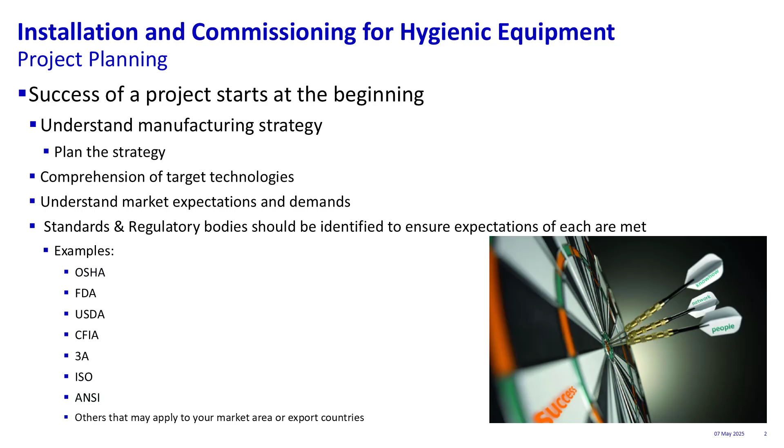And then if you are running or moving your project to export countries, understanding what their regulations are as well, because they may be completely different than where you're manufacturing.

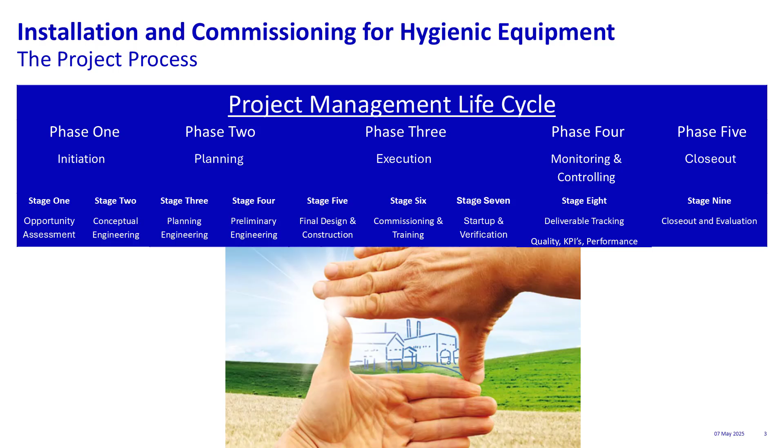Project management life cycle. These are best practices from the PMBOK. Basically, you're broken down into the 5 phases of a project. So your initiation, your planning, execution, monitoring and control, and closeout.

This is where upper management generally wants to start. They just want to dive right into the execution. They don't want to spend a lot of money in the initiation or really the planning stage. And this is where most projects will be broken right out of the gate.

So ensuring that you have your initiation plan and your planning stage and you have all the right people. Now you'll notice, because on the engineering side, when I say conceptual engineering, planning, there's many different engineering aspects, from your project engineers, your process engineers, mechanical engineers, so forth.

So there's many more pieces to each one of these stages, but I'm going to concentrate really on these engineering sections and then into the execution.

But really, these 2 pieces are where most of your time and energy should be spent, and then the execution and then really the monitoring and closeout become much easier. So the hard work is really up front.

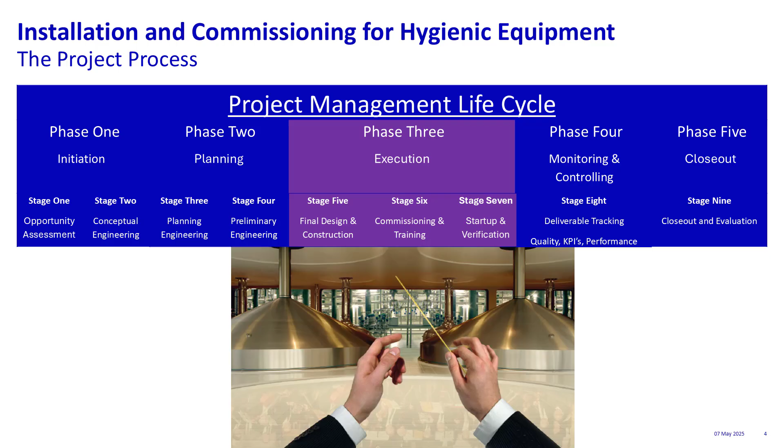We're going to dive in to the stage 5, final design and construction, commissioning and training, and startup on the execution side. And I'll cover some of the initiation and planning as well.

Project acceptance guidance. On the stage 5, you should have commissioning SMEs and tasks identified. You'll be completed at this stage.

Equipment design review. So those, again, were all done in the planning stage. These should be completed before you move into the execution stage.

Equipment delivered, so now that your equipment's arriving to site. But before it's arrived to site, you've completed FATs.

This is very critical. I've experienced this many times. We had a labeler that was very critical to the project, and because it was in Germany, upper project managers and upper management decided that they were going to the FAT, and that none of the people who were involved, the key stakeholders, so forth, were not invited and did not attend.

So when the equipment arrived and we asked for the FAT documents to say who did the checkout, none of the FAT documents were filled out. What I mean by FAT documents, you should have quality, original engineering scope, your safety protocols, everything should be documented on a document that you're going to check out on that equipment.

You're at stage 6 now, your commissioning kickoff meeting, and so this is important. So you have all your stakeholders, all quality, all operators, everybody who's involved in the commissioning stage. Don't leave people out. There's a lot of times where the core team meets and all the other people are left out, but they're still expected to operate and commission the equipment.

And again, safety review. So the whole commissioning team should be reviewing the safety, and if there's any other items that come up during those meetings, address them before you go out to the plant floor. And then again, the quality reviews, same thing. Review those documents. Make sure that you have all your quality issues resolved, or concerns resolved, or they may be low-level items both on safety and quality, and it's a longer-term fix as long as there's not a safety or a product quality issue, or you're going to induce product safety issues as well.

And then your punch list is now operationally complete. Again, you might still have some building punch list items or engine room punch list items, but you should be at an operationally complete stage at this point.

GMPs, SOPs, SSOPs are established. So these are critical, so when the employees are walking out to the plant floor, they know where they're going to wash their hands, they know what PPE is required, they know the standard operating procedures have been written based off the OEM recommendations. Obviously, they're still going to be modified as you move forward. And then your SSOPs for your sanitation team to ensure they understand how they're going to clean the equipment.

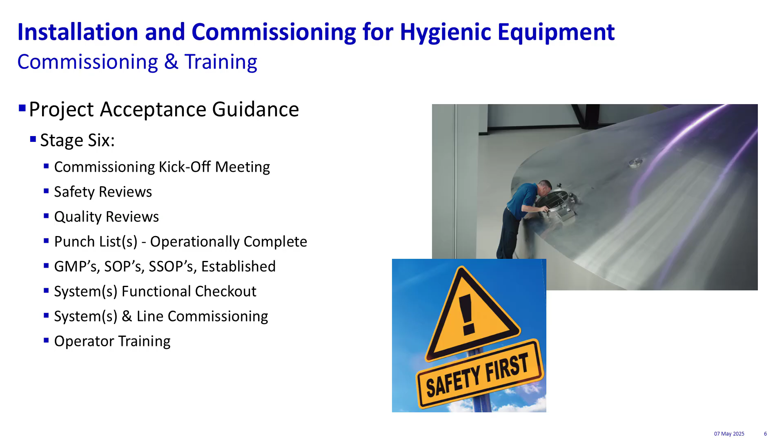You're through those kinds of learning curves and also some of the struggles. You will have struggles, there'll be hurdles, there'll be new punch lists that are created, but that's all part of the project process.

Stage 7, again, you're doing a startup meeting, you're going to run your first test products. This is where all the safety reviews, quality reviews, everybody's in agreement, punch lists are complete, engineering and vendor support is on site. When I say engineering and vendor support, if you have major equipment, your vendor should be on site. Pay for it because it will help you go through the commissioning process, the training process, and start up much smoother. The other key piece is your engineering.

I can't count how many times a company will pay for the engineer of record, who has done all the design for the facility, and at commissioning, because they don't want to pay for having those engineers on site, they let them go. The engineers never see the final product of what they've done, and they're not there to help. That will hinder you in multiple ways. One, most engineering firms will find their own errors and will take pride in it and fix it on their own, and generally they're not going to come back with a change order because they understood what their mistake was. So there's pride in their work as well.

It also helps you get through the commissioning process because they understand from day one what the goals were. They did all the drawings, they've done all the reviews, and they've helped throughout the whole process. So releasing them at this stage is detrimental, in my opinion, to your project.

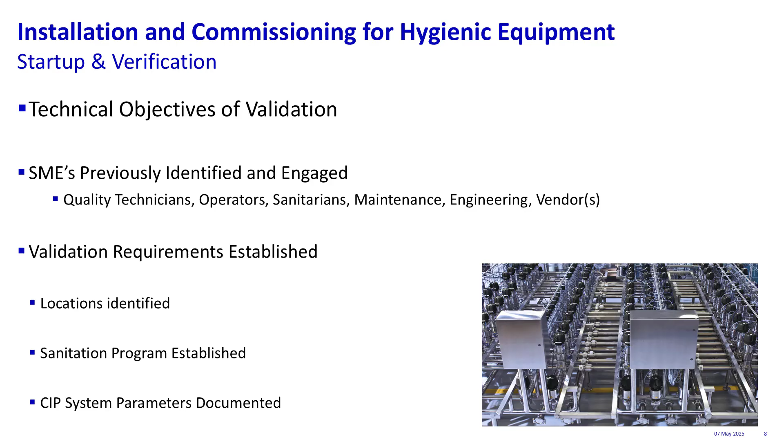So we talked about the quality documents, but diving a little deeper, you should be identifying the locations where you're going to be doing your quality testing, so swabbing or whatever tests have been deemed adequate for that validation of that equipment. Your sanitation programs established and your CIP system parameters established. I talked about SSOPs and SOPs, but this is a critical piece in understanding what actual method we're using in your sanitation program, open plant cleaning, COP, CIP, SIP, and making sure that during that commissioning stage all of those systems are running before you get into the validation stage. Because your validation is basically stating that what we've decided to do is producing clean, adequate equipment to produce healthy and unadulterated product.

Method of validation testing - is it visual? It will be visual, but also microbial testing. Are you doing total plate count, ATP, Listeria, Salmonella? Are you doing allergen testing? There are others too that you can add to this list depending on the product, but it covers a broad range here. There might be things specific to brewing, but dairy's going to be looking for other things as well. At the end of the day, understanding and having that documented and everybody agreeing to what those tests will be, what the pass-fail method will be, and also if there are issues, who is going to resolve them.

Obviously you don't know where that problem's coming from when you go in, but identify it. Is it coming from the CIP system? Is it part of inadequate open plant cleaning? Identify them and resolve them before you go into that final validation.

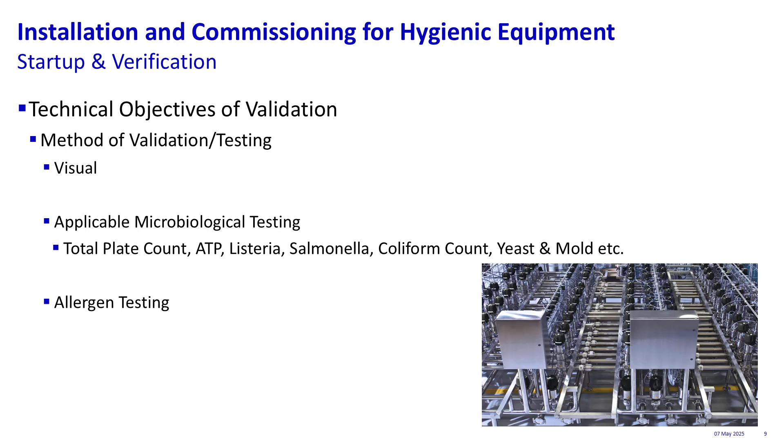I highly suggest having a validation program. I say this because this is missed in the 3A document. I have customers who will say my equipment must be 3A or I won't put it in. But there are a lot of pieces of equipment that a company has not decided to spend the money to have go through that 3A approval process, but it still may be the right equipment for your operation. In those cases, FDA, USDA, all of your regulatory bodies have an out in those situations, and that is a written validation program. If you can prove the equipment you've installed has gone through your validation and you have written documentation of that, you meet the requirements because you have proof that it's cleanable and has no microbial issues in the process. However, starting off with the 3A standards is always a great place to start because it's already been reviewed and there are other people in the industry using that equipment.

Sanitary valve sanitation considerations: all parts in contact with product must be cleaned at a regular interval. Always observe the operational manual and intended use. This is one that we struggle with a lot. We get a lot of phone calls on equipment and no one's read the manual. This goes way back to the planning stage and the SMEs and the stakeholders. All the manuals, all the spare parts, all of that information should have been provided, and the expectation of those individuals is that they've read those operational manuals before you get to the validation and operational stage, because it can answer a lot of questions. Most manufacturers have pretty good OEM manuals. I've seen others that leave a lot out, but use the manuals.

Always observe the chemical safety data sheets. Use cleaning agents that don't cause damage to seals and parts. We see this often - we don't receive all of the information. Somebody selects EPDM or FKM or other seal material, and I know there was a seal presentation yesterday, but this is critical for your performance long term. If you're repairing valves constantly on your seals, there's a very good chance either the wrong valve was selected or the wrong seal material was selected, which is normally the case.

CIP solutions should flow through all product contact areas of a valve. This goes back to your engineering stage as well. I know most of you have probably heard this many times, but there is a bias to always look at your process design from a product standpoint, and cleaning and CIP becomes secondary. I can tell you I've seen both sides. I've seen where the product was primary and CIP was secondary - a plant manager saw a 3-tank CIP skid at a trade show, bought it from the show, dropped it in the plant and expected it to work. Haven't seen that one work. So understand flow through those contact portions is critical, including that CIP and cleanability at the process design stage. That should be paramount, because we don't start with product, we start with cleaning, and then we run product. But most people look at it as the opposite.

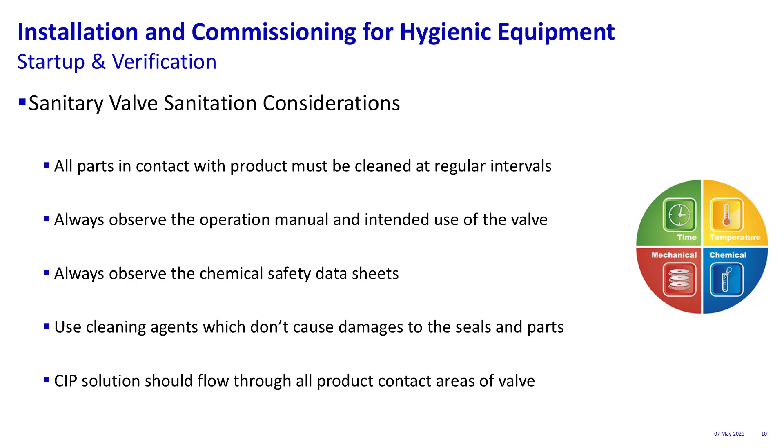Your cleaning method should be established by consulting your OEM and chemical supplier, so include your equipment suppliers, but also include your chemical supplier because they generally have a lot of knowledge in the CIP space. If your chemical supplier doesn't have a lot of CIP knowledge, then look for outside resources.

A lot of times your engineering firms will have people who are very trained in commissioning CIP systems, so utilize those resources as well. Based on product type, relevant process, and quality team expectations, a lot of times you can have one person on a quality team that has different expectations than the rest of the team, and when that happens, it slows your project down.

Allowing people to express their concerns before you get into that stage and addressing them is critical. Or, to be blunt, some people just want to be busybodies and be the center of attention. You go through them, but if you have all your documentation and your validation, generally you can squash those concerns because your whole point is to validate and prove that it's cleanable. But if there are regulatory issues found, address them and move forward in the project.

Cleaning effectiveness and reliability of clean depends on multiple things. Design is the key piece—you can have the best chemicals, you can have the best people, but if you have a poor design, those individuals and the time and energy required to clean that poor design is going to be detrimental to your operation. Ensuring that you have a good design up front is critical.

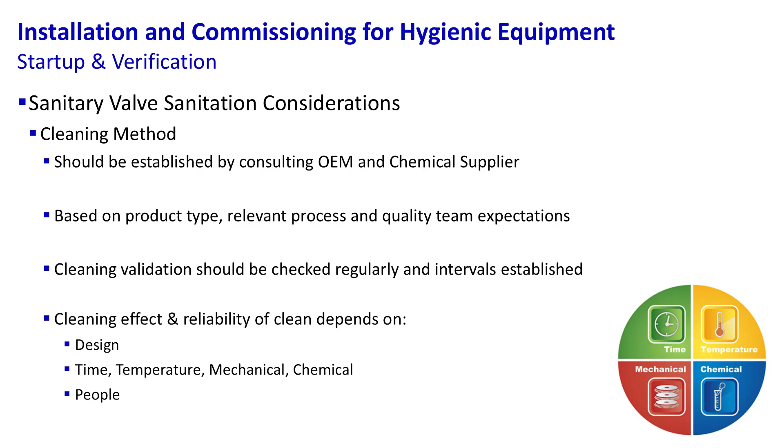I should have mentioned it earlier, but team selection for your project matters. In larger corporations, everybody wants equity and inclusion of everyone. However, if you're the coach of a Super Bowl winning team, are you allowing other people to dictate who's going to be on your team, or are you selecting the team members to win the Super Bowl? It's the coach that's doing that. Ensure you have the right people, and that's hard. If you don't have the right internal people, find the right external people to help you meet your requirements for your project.

Valve setup and commissioning. Mix-proof valves are used for the mix-proof shutoff of high-grade, non-abrasive products at intersection points in pipe systems. We say non-abrasive, and we do have methods to assist with abrasive products as well, but in general most products in the industry are non-abrasive, with a few exceptions. A prerequisite for reliable and safe operation of the valve is professional installation and assembly. We had the seal presentation, the welding presentation, and the secondary food contact presentations. All that is included in this section.

When we build manifolds, and many other people in the US build manifolds too, making sure you're selecting people who are experienced with that type of equipment is critical. There are many times we've had to come in after the fact when manifolds are sagging, not pitched properly, not draining properly. The valve can only do what it can do within its scope. The things done around it, it cannot control. That's where the design comes in, and the final build.

Adhering to operating, inspection, and maintenance instructions means reading those manuals. Only qualified personnel may work on or remove the valve from service. This is important for communication.

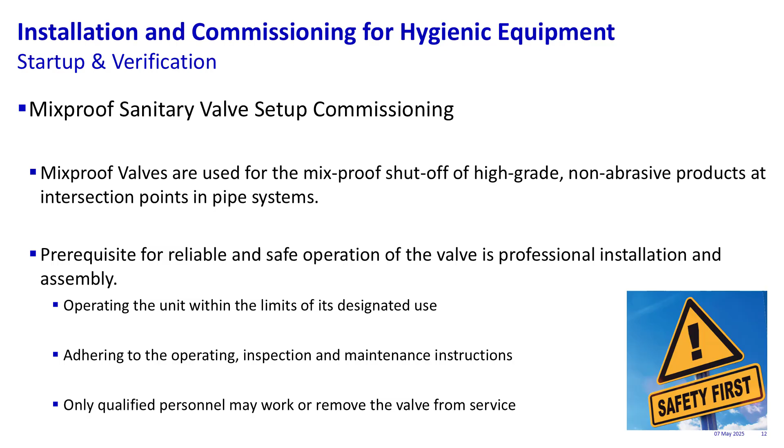A prerequisite for reliable and safe operation of the valve is that personnel must wear suitable PPE. Understand your product and the potential chemical safety of what could be in the line, but also line break procedures. I highly suggest a line break procedure or an out-of-compliance work order. There are many different terms for it, but basically if it's a non-standard practice, you document it with the team—safety is involved, but also your operators and maintenance team—so everybody agrees on what the safe method is. This includes locking out pumps and bleeding off lines to make sure there's no safety issue. Some of the pressures we're seeing, especially around membrane units, are up to 900 PSI. Pulling a valve at 900 PSI will be detrimental to the people around and to your equipment. High caustic or acid levels in the CIP system can be a problem as well.

Clearly define those procedures, and ensure competent, responsible people are working on the valve. Everybody must know what to do in case of emergency.

So a lot of these valves, especially in manifolds, this is where the design stage comes in. I've seen where people have had to put a piece of plywood on top of the control tops and crawl out 30 feet above the ground. They're harnessed and they're trying to pull a 4-inch valve. That's a poor design issue.

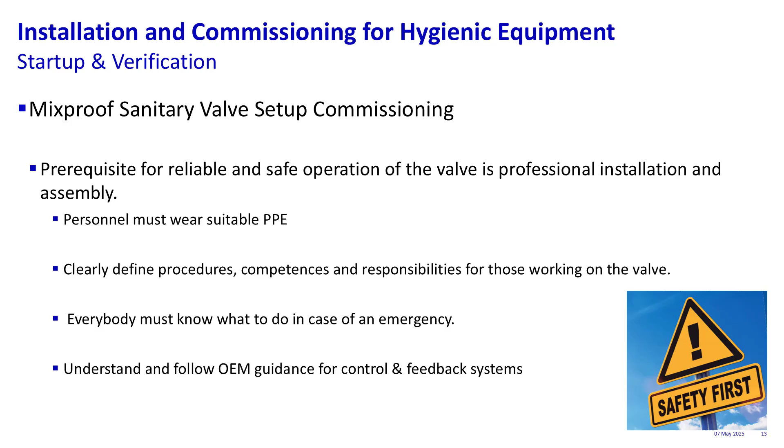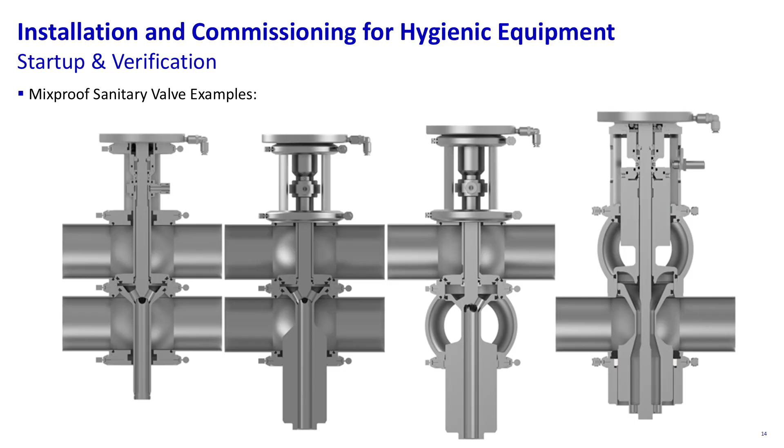You'll also notice there's some connections in these locations. This is for spray cleaning or external spraying of the cavity based on your product requirements. This is a spray cleaning operation, so if you have very sticky, high particulate product or many other reasons, you can do an external spray that cleans out the inside of this cavity under higher pressure. And then you also have your seat lifting, upper seat lift, lower seat lift, so you're cleaning the seal areas and also cleaning the cavity.

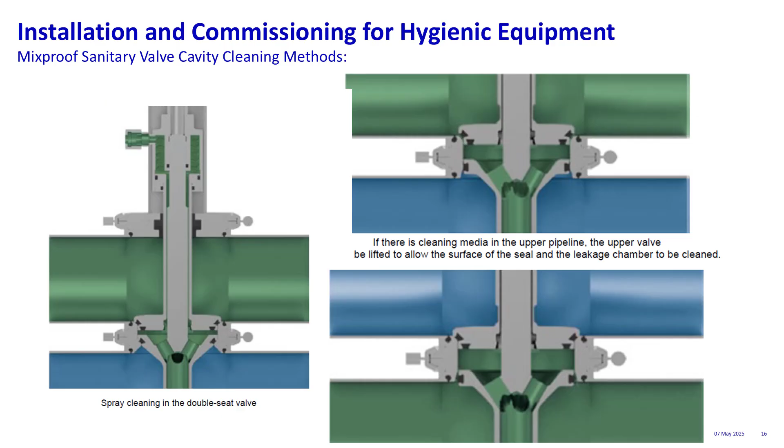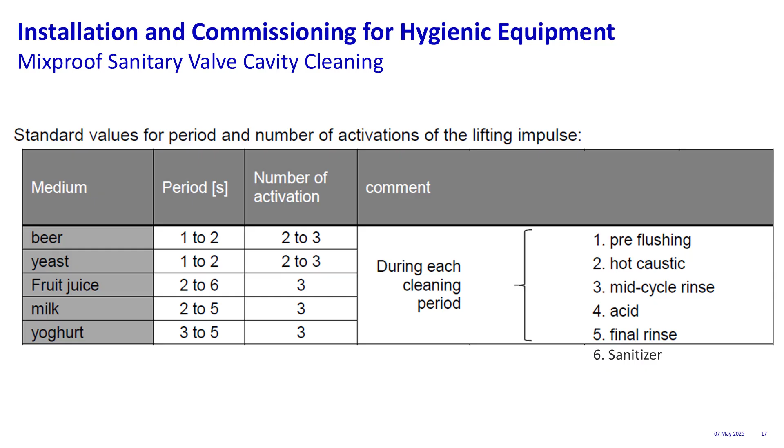So understanding how the valve operates and where your product is in contact with the valve is critical on the validation stage of the product. Some overviews, these are only guidance. This is all up to your quality team, your engineering team, so should have influence, and your controls team, on when and how often those seats should be lifted during CIP.

The one critical piece, and I see this very often and why I mention it, is the program will be set to start seat lifting as soon as the program starts. These should really always be tied to verification of flow at the end of your line, not at the start of your line. So you want to make sure your line is completely filled before you start doing any seat lifting, because if you start right away, you haven't verified flow, all you're doing is dry lifting, and there's actually no cleaning solution or pre-rinse that's happening within that area.

Then the last piece is the swabbing locations of the valve. So selecting the swab location within the valve should be part of your quality documentation. So when that valve is pulled, you're swabbing on the stem, you're swabbing inside the cavity, you're swabbing the housings. Those are your points of product contact, and you should be getting negative results if your CIP and chemicals are doing their job, or if you're doing heat sterilization.

All these surfaces should be negative during that validation. And most validations require 3 passes for that validation, and if you fail any one of those 3, the clock starts over and you have to do revalidation again. And when you say validation, it's not just the very first time you run new equipment. It should also be done if there's modifications in the process line, a pump was changed to a different type or different flow rates, the validation for that section should be redone as well. Or if you've changed the product type considerably, let's just say you came from a water-based product like soup, and now you're doing a very heavy cream-based product.

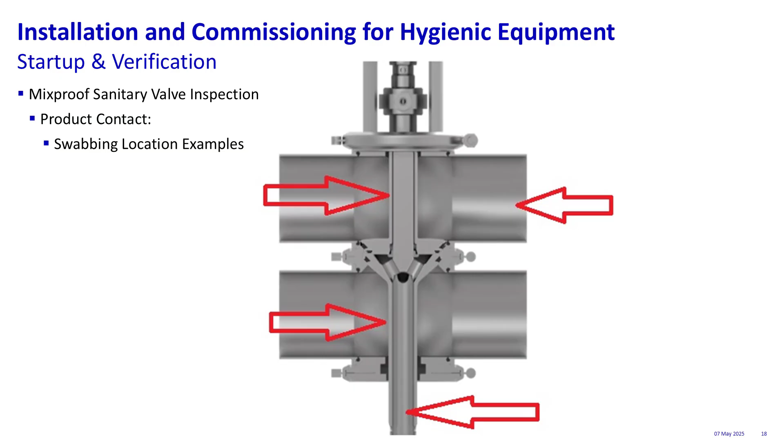Those products are going to require a different cleaning time, or potentially even chemical changes or mechanical changes, to ensure that validation passes. Some other pieces of equipment outside of valves—understand other valves and process devices in your system.

This is devices around a tank. You have single seat valves, reverse acting valves, and in my area there's also a very big tendency to always use a branch T for instrument devices. In a lot of cases it works for fluid, but if you have high particulate or very sticky products, or a CIP system that's compromised so you're running at limited or minimum flow rates, you can have issues in these branches.

To solve that, you basically use the same type of housing you would in a valve. All of your instrument suppliers—we don't supply the connections, the instrument does—and we're not the only ones producing this type of instrument housing, there are many others as well, but it's cleaner and easier to clean in your process. I say this from a validation standpoint because I've had many situations where we've failed validation in these areas, then removed and put in a cleaner instrument device and passed those validations.

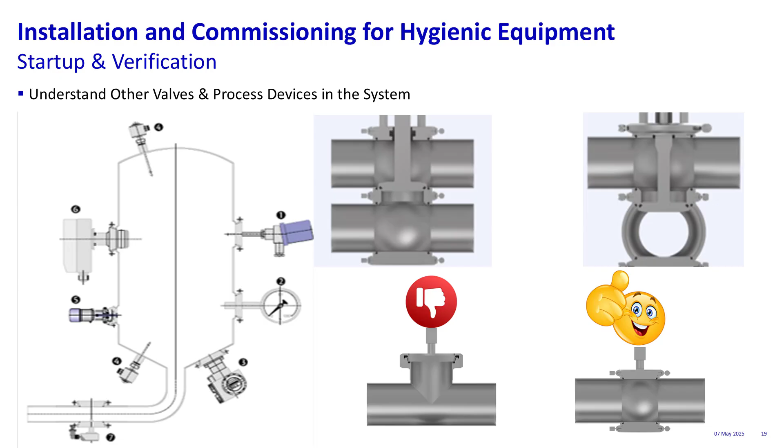Water hammer is going to cause not only valve failure and an increased maintenance protocol, but it can be detrimental to downstream equipment. We won't cover it here, but if you get really bored, go to YouTube and look up water hammer videos—there's some pretty impressive engineering. You're talking 50 to 80 Gs of force under water hammer conditions.

These valves are designed for about 16 bar for reliable operation. If you go above that—again at those 33 feet per second—and you get water hammer where your fluid's already running at that speed, we've seen stems broken and housings burst. We actually just saw a side of a pipe where they literally blew fluid through the side of the pipe due to water hammer issues. So we can help solve that, and your engineers can help solve those problems too.

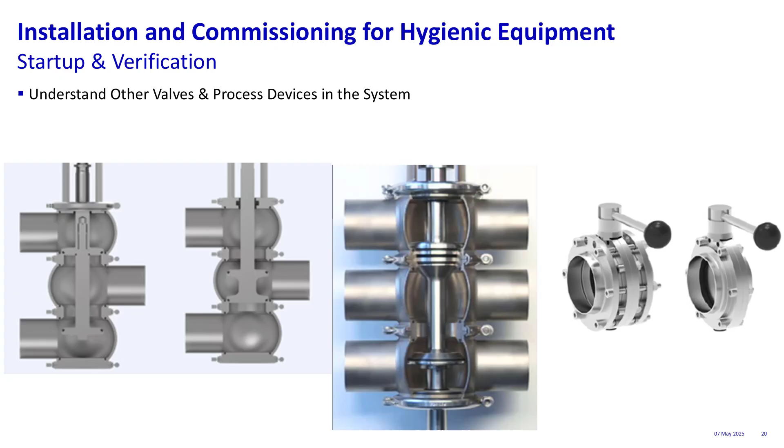So the last piece: validation records and recommendations. Certified startup procedures, your CIP records recording time, pressure, temperature, conductivity, titrations, flow, change control, and revalidation procedures. The change control is critical for your PLC and your pinning charts.

If you have people working at night who can access these items and just change them because they ran into a problem, they may not understand the whole process, and with no controls over those changes, you can cause issues for your product and your process. So ensure you have good change control management and revalidation procedures under those controls.

Initial maintenance and intervals established, so those are the critical spare parts on hand. I know this is always a contentious one because a lot of plant managers want the spares purchased under the capital project—however, we're not the government, and the government says you can't do that under capital. There are some unique ways around that, so change some of the wording, but at the end of the day, make sure the spare parts are on hand, and then project acceptance sign off.

At this stage there are lots of hours and lots of lost sleep, but a lot of celebration if everything has been followed and the project is successful. Thank you.